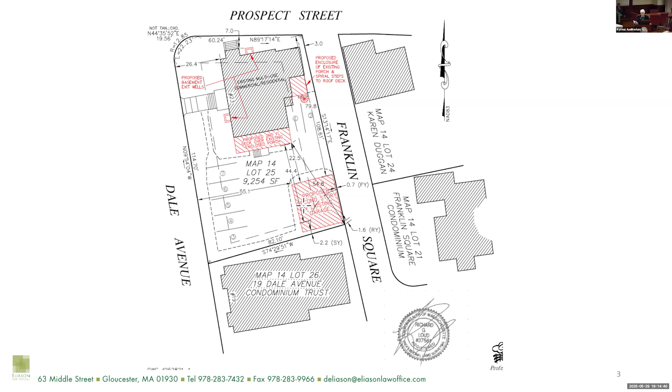There are 4 parking spaces required for the residents, 2 spaces for the office. That leaves 2 extra compliant spaces and the extra smaller space. I'd like to turn the presentation over to Mr. Taormina to explain how the building's going to change.

Sorry. Joseph Taormina, Taormina Architects. I'm at 10B Riverview Way in Gloucester. And I'll give you a brief overview of the proposed changes to the main building and the detached garage.

A little bit of overlap of what Deborah had said, but the 2 existing businesses on the first floor will be converted into 2 residential units. Each unit will have some basement living space, and therefore we have some egress window wells to provide the emergency exit for those basement bedrooms.

The existing porch on the Franklin Square side will be enclosed for living space. The 2 existing residential units on floors 2 and 3 will remain residential, as Deborah had said.

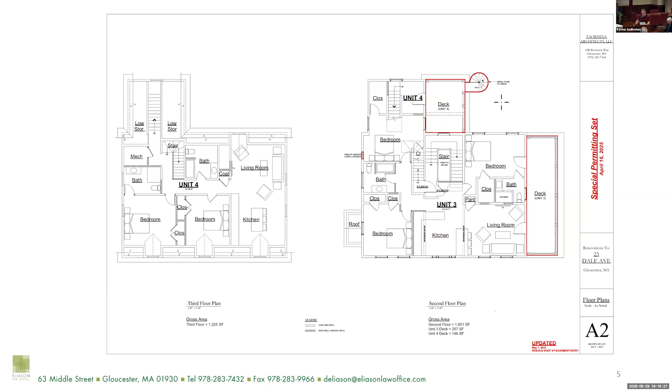Each unit will receive an exterior deck space at the 2nd floor level. Above those, there's a porch on the south side, the parking lot side, and on the east side, the Franklin Square side. Those 2 areas have flat roofs and will become decks for the upper units to have some exterior space. One deck, on the Franklin Square side, will have a spiral stair down to the driveway level. There are 2 massive chimneys proposed to be removed to accommodate the interior layouts.

The roof of the basement access, on the east side facing Franklin Square, has to be rebuilt. That's noted on the architectural plans, not the survey plan. It's really just to allow the stormwater to shed a little better and flow away from the building.

Each of the 4 units will have secured storage in the basement, plus there's an opportunity for bicycle storage. The basement will also contain the fire sprinkler room, 2 one-story areas - one on the south side, the driveway side, and one on the Franklin Square side. They're supported on piers right now, so we're proposing a permanent concrete foundation under those 2 just to protect plumbing, keep critters out, and make it weather tight.

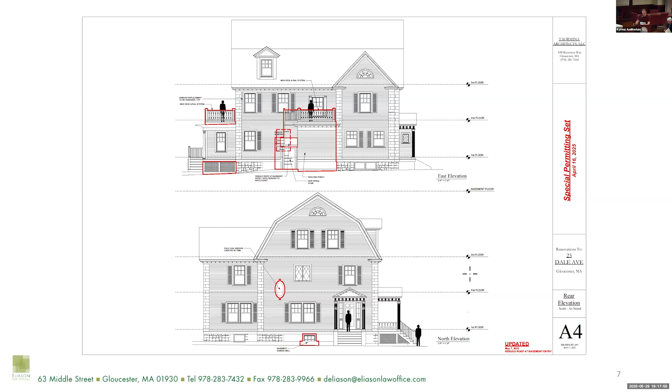Other than the 2 new 2nd floor decks, the exterior will generally remain the same. There's vinyl siding that will be replaced with new vinyl siding. There's a lot of painted wood trim that will be cleaned up and a lot of Victorian details that will remain. The goal is to maintain all those exterior details and replace as needed. The spiral stair and the basement window wells are the only changes to the building's footprint.

Over at the detached garage, the roof will be removed and a new second floor will be constructed. The stairway that goes up will take away from one of the spots in the garage, as Deborah had said, because of the new stair to get us up to the second floor private office.

The existing exterior stucco wall finish will be removed and new vinyl installed so that it matches the main building. The goal is for the exterior finishes to match and coordinate with the main building, so we will have a little bit of that Victorian detail there. That's the overview of the architectural changes to the two buildings. Thank you.

Thank you, Mr. Taormina. In addition to the variances and special permits we're requesting from the zoning board, we will also be seeking relief from the city council for the conversion to a 4-family, relief for height, which is existing at 39.4 feet and will remain that way. The new garage will be under the required height at around 26.5 feet. The reduction in lot area will also need relief. However, open space per unit is compliant.

We will also be seeking a certificate of appropriateness from the Historic District Commission because this building is in the Historic District. Mr. McSweeney sent out letters to all of the legal abutters. We've received 2 written letters of support, but they were not received in time to submit them to your package.

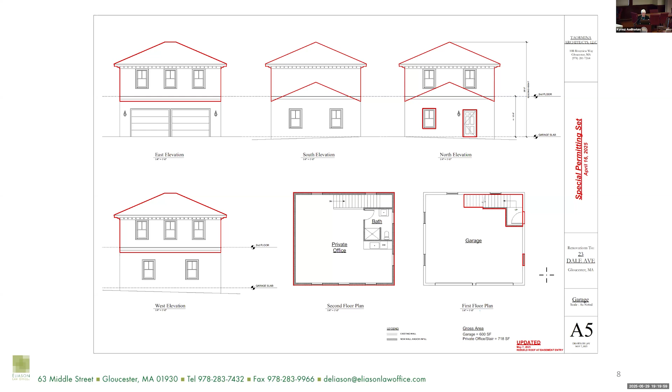Now I'll just go through the legal requirements. The variances may be granted without substantial harm to the public good and do not substantially undercut the purpose of the ordinance. Variances are for existing conditions, and the only reason they're needed is because of the change in use. The substantial hardship is the lot shape, having 3 front yards, as well as pre-existing conditions. The buildings were constructed around 1900, before there was zoning, and built very close to the lot lines. The setback encroachments are due to these locations.

We will add residential units that are sorely needed by the city. Since the office market has softened somewhat due to the trend of people working from home, in contrast, the housing market has risen. For these reasons, the variances do not substantially undercut the purposes of the ordinance and do not harm the public good.

With regard to 1.8.3 criteria, the proposed change of the garage to an office use is in harmony with the intent and purpose of the ordinance. The GZO allows conversion of the garage to an office space with a special permit. The amenities of a kitchenette, a sink, and a dishwasher, as well as a 3/4 bath, are customary features allowed by special permit. I would suggest that none of these will adversely affect the neighborhood, the R5 district, or the city.

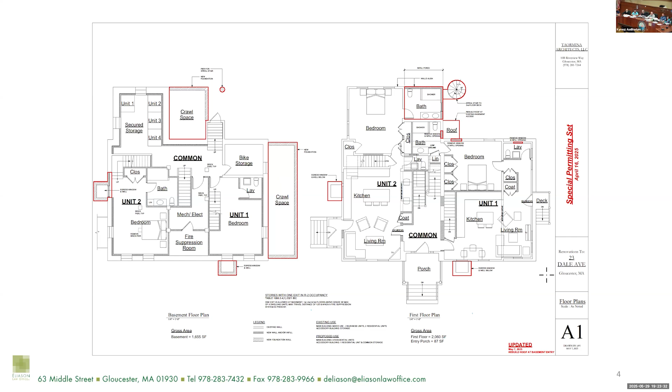So with regard to variances, we need a lot area variance of 746 square feet. For the residential building, we need a front yard variance of 12.7 feet on Prospect Street and 16.7 feet on Franklin Square. For the office building, we need a front yard variance of 14.3 feet on the Franklin Square side, a right side yard variance of 5.3 feet, a rear yard variance of 18.4 feet, and a vegetative coverage variance of 18%.

These are all existing conditions. The special permit under 2.3.4 subsection 1 is for the conversion of the garage to an office building, and special permit 2.3.7 clause 21 is for the customary accessory uses of a kitchenette and a 3/4 bath.

You can leave that up, if you would please. If you can just leave this up. Sure. Are we leaving off a special permit for the height of an accessory structure?

It's conforming, not the main house. The accessory structure doesn't meet the required setback—wouldn't it need a special permit for being over 12 feet? It is actually not an accessory structure, it is a principal structure, and there can be two principal buildings on a site that has multifamily.

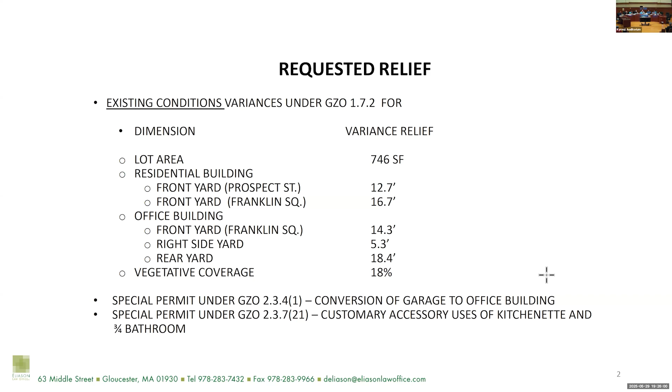But anyway, why don't we take some public testimony first, and then we can discuss that. Is there anyone in the audience or on Zoom wishing to speak in favor of the application? If you're here, come up. If you're on Zoom, hit your raise hand button.

Seeing none, is there anyone wishing to speak in opposition to the application? Nope, don't see anyone. Will close public testimony.

Discussion by the board, or more questions? I think probably similar feeling to you. Both of us have been on for a while. Not a big fan of the kitchen. Not a real big fan of the 3/4 bath, but I can probably tolerate the 3/4 bath without a kitchen. So those are my initial thoughts.

I mean, it is customary to have a place for coffee, wash your dishes, your lunch stuff, microwave, dishwasher maybe, I don't know, but I know what you mean. But what constitutes a kitchen versus... typically a cooking stove. A stove makes it a kitchen, right, Mr. Building Commissioner?

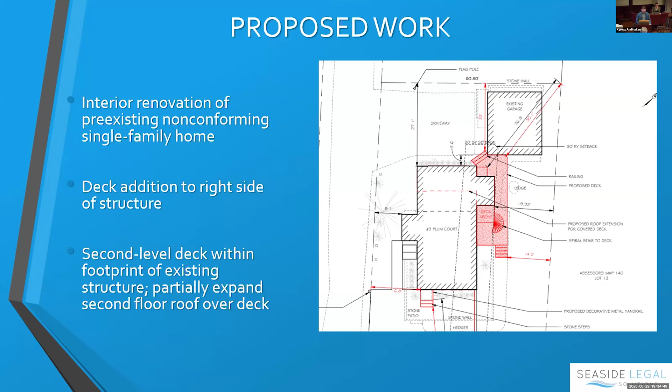By way of background, we're in the R20 district. It's a pre-existing non-conforming structure on a non-conforming lot. The lot itself is undersized, and the principal structure encroaches into the Plum Court front yard setback, and then partially into what's considered the right side yard setback. It's a corner lot, so the right side yard would be from the Washington Street side. I'll get into more detail on the next slide.

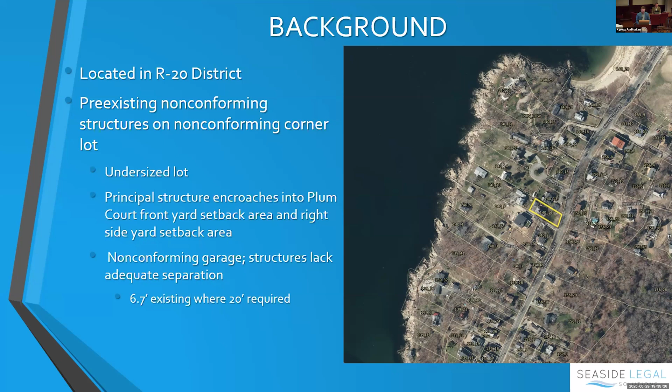There's a non-conforming garage in the rear of the structure, and the two structures presently lack adequate separation. There's around 6 foot 7 inches existing between structures where 20 feet is required in the R20 district. So we're seeking a special permit to alter and expand under GZO section 2.4.3.

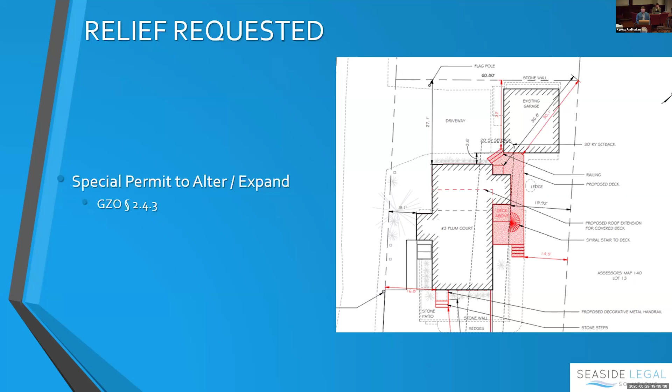This should need only a special permit, no variances, for the following reasons. As I mentioned, it's a corner lot, so the actual buildable envelope of the lot is shown as the dashed blue line on this slide. What's shown on the left is the Plum Court front yard. What's shown on top is the left side yard setback area. What's shown on the right is the right side yard setback area. What's shown below is the Washington Street front yard, which is out of screen because it's conforming and not really relevant to the work.

What's shaded in red is the actual expansion upon the current footprint of the structure, that is the right side yard deck addition. As you can see, we're very close to that setback line on the right side yard, but we are over that line. So it is presently non-conforming with respect to that right side yard setback area. While we are increasing that non-conformity, we are not creating a new non-conformity, so a variance should not be required.

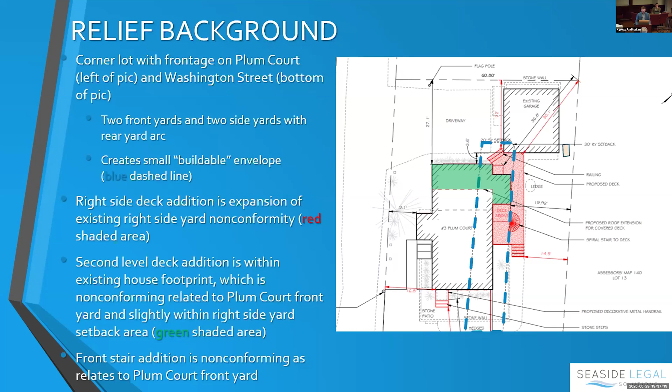The second level deck is wholly within that green area, and there's a partial expansion, 6 foot 6 inch expansion of the second level deck, which again is wholly within the footprint of the existing structure, but it is in that Plum Court front yard setback area, so that would probably also be considered an expansion of the pre-existing nonconformity. Lastly, at the bottom of the screen there's a front stair addition, which is completely non-conforming with respect to the Plum Court front yard setback area.

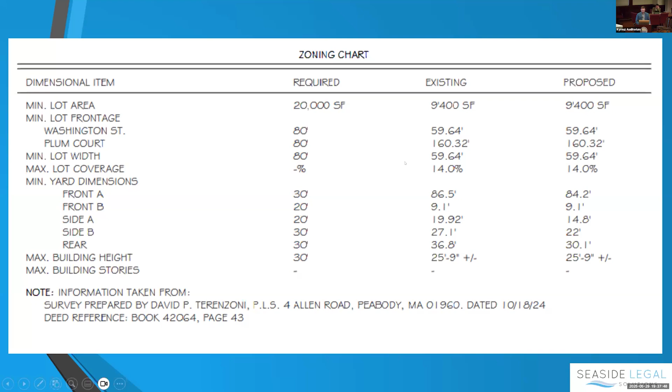So we are, again, non-conforming with respect to that right side yard setback area. You can see that right there on this version of the site plan.

Here's the floor plan for the first level. What's in red is all new work, mostly interior, but at the top of the screen there's the deck addition which goes beyond the existing footprint of the structure.

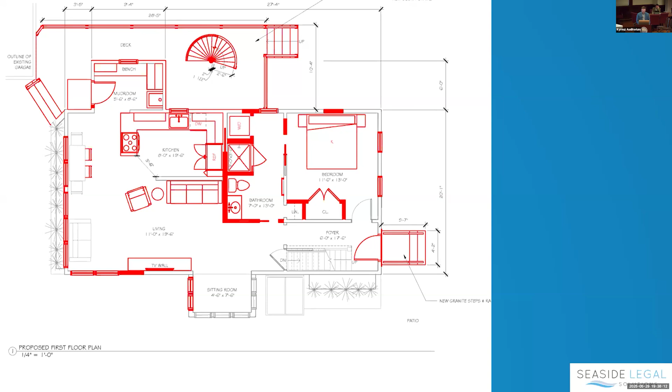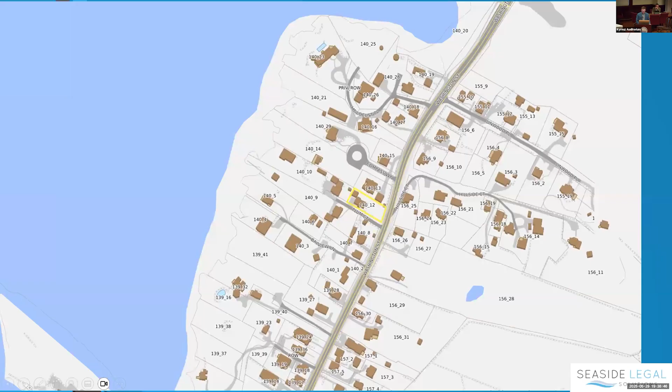The standard for a special permit to alter and expand is that the board must first find that the work will increase the non-conforming nature of the single family structure. If so, that work cannot be substantially more detrimental to the neighborhood than the existing non-conforming conditions.

As I mentioned, the second level deck is wholly within the existing footprint, and the front stair is no closer to Plum Court than the existing footprint of the structure, so we're not expanding the nonconformity in that respect. But the right side yard deck addition will increase that right side yard nonconformity, so we do think the board will find an increase in the nonconforming nature of the structure. Here's that plan again, if you have any questions.

Once you find that it does increase the nonconforming nature of the structure, you must find that it's not substantially more detrimental to the neighborhood than the existing conditions.

Again, we're not getting any closer to the Plum Court property line with regard to the second level deck or that front stair addition. And where we are expanding the nonconforming nature of the structure on the right side, there's a large vegetated border between the two properties, which we would take a condition to maintain, should the board feel that's necessary.

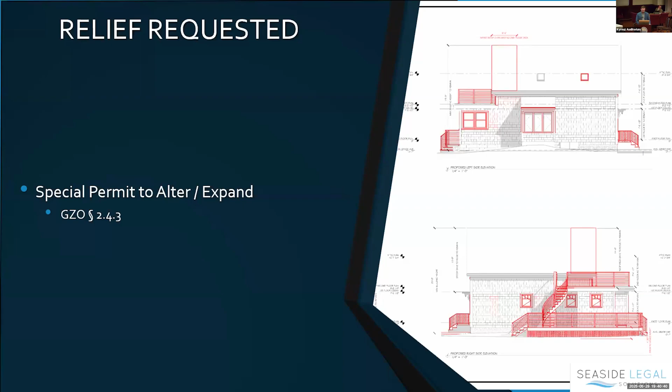Here's just a picture of that vegetated border, which would shade that addition that's mostly on the north side. So where the structures are relatively close to each other, that vegetated cover should provide sufficient shielding. So again, we're just requesting a special permit to alter and expand, and that is all. Thanks.

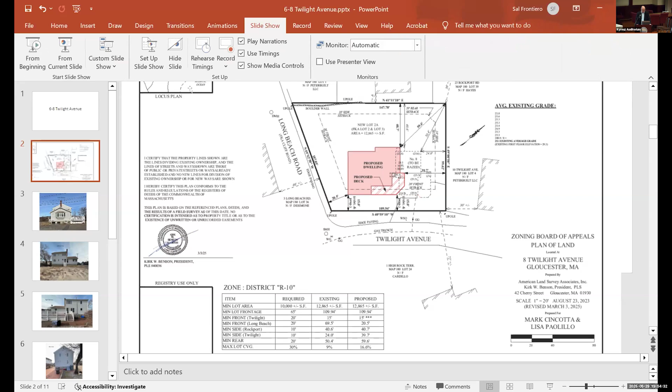It will increase lot coverage by almost 7%, and although it's still going to be 15 feet away, there'll be more building bulk within the setback, adding about 20 square feet total. So we're here seeking a special permit for that reason. As this board knows, it's a two-pronged test. The first is, are you increasing the nonconformity? I would submit here, although it's de minimis, we are in fact increasing the nonconformity, because we have more linear feet within the front yard setback. So although it's minor, it is increasing the nonconforming nature.

Here's some pictures of the existing home in the front. Here's the right side view, and here's the other side view, and this is a rear view. It's a fairly modest house. This is a street view, and here you can see the corner lot. This is the vacant lot I was talking about, and the lot line is about right here. The house is going to be shifted about 50 feet to the left and increased in size slightly.

Because we are increasing the bulk within the front yard setback, I would submit we are increasing the nonconforming nature of the structure, and therefore we need to go to the second prong of the test. Here, with very little effect on the front yard setback, we are on a corner lot. Also the front yard setback is actually in practicality a little bit greater than it appears, 15 feet, because the road is not paved to its maximum width. Also, although we're complying with the left side yard setback, we also are abutting a street there, so it won't be close to another residence. Based on that, I don't think it'll be substantially more detrimental to the neighborhood.

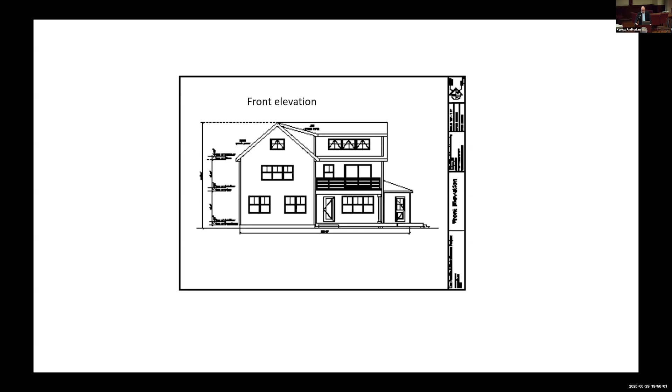Also under 2.4.5, we also have to condition that the tear down and rebuild be approved in the same hearing, and that the rebuild happen as expeditiously as possible after the tear down. This is the proposed front elevation, and this is the proposed left elevation.

There's the right, and there's the rear. Based on this, I would submit to you it's a very minor change, so the special permit should issue here.

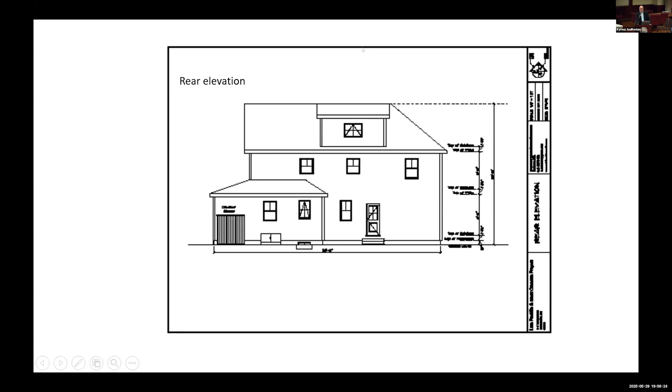Just curious, you don't have to answer if you don't want to, because I don't have an issue with what you're asking for with the special permit, but why not just move it back? I was just curious. Good question, I'm not sure. I think they maybe wanted to maintain the same facade they had. I'm not quite sure about that. The view, and like you said, there's a lot more distance because of the road. Right, there's a lot more usable distance than there is legal distance. Okay, I was just curious.

Okay, we'll take testimony. Anyone wishing to speak in favor of the application? Come forward or raise your hand. You're on Zoom.

Good evening, Joel Favazza. I'm here speaking on behalf of Susan McNulty and Peter Carboni. They own and live at 2 High Rock Terrace, right down the street. They were before this board a few years ago seeking very similar relief, to take the existing house, expand it a bit, and rebuild. You were kind enough to grant them the relief then. We think we understand the plight of these neighbors as well, and we would hope that you too would grant them the same type of relief and allow them to also rebuild their structure.

Thank you. Anyone else in favor? Being none, is there any opposition? Anyone wishing to speak in opposition to the application? Sally, you can't speak in opposition to your own client. I know that, I'm aware of that. Okay, close the public testimony. No need for rebuttal.

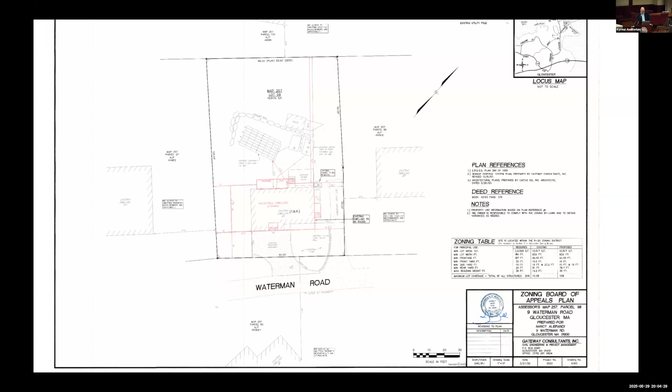Here is the building itself — this is the existing building, and it's being expanded to the left a bit. Here is the existing structure: a side yard view, front yard view, and most importantly a rear yard view. This is a rather unsightly roof deck that my client inherited when she bought it. Many people don't like roof decks for their appearance and for the lack of privacy you get, so that'll be completely eliminated as a result of this application. And there's a street view.

The new house will be a 3-bed, 2.5-bath. I do want to mention I made a slight mistake on the application — the front yard setback is being decreased in one spot slightly.

It's being increased only by 0.6 feet, so a very de minimis increase. And the overall lot coverage will increase by 6%.

But because we're on an undersized lot and we're increasing both the area and the bulk, and because we're increasing in a de minimis fashion the front yard setback nonconformity, I would submit that we are increasing overall the nonconformity of the site, and we need to go to the second step, which is whether or not this is substantially more detrimental to the neighborhood than the existing situation.

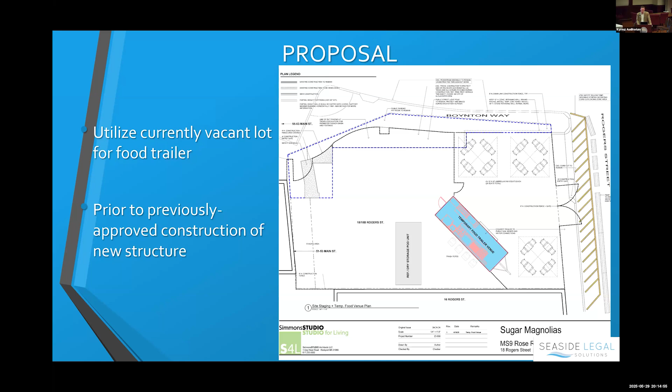By way of background, we are in the CB district. Missy received zoning approval back in 2023 to construct a 3-level multifamily building. The ground level will be Sugar Magnolia's permanent restaurant, with 2 residential units above it. We're facing some construction complications outside of the applicant's control, and as a result we have not gotten the building up yet. We're hoping to commence construction as soon as possible.

But at this point, to lose another summer season is really detrimental to the long-term viability of Missy's business. Looking to maintain business continuity and community connection - I'm personally looking forward to getting some lunches from Sugar Mags again, I think I'm way out of shape since I stopped getting salads there. So she's going to run the food truck during the peak summer months, and then at the end of the busy season, remove it and hopefully be breaking ground.

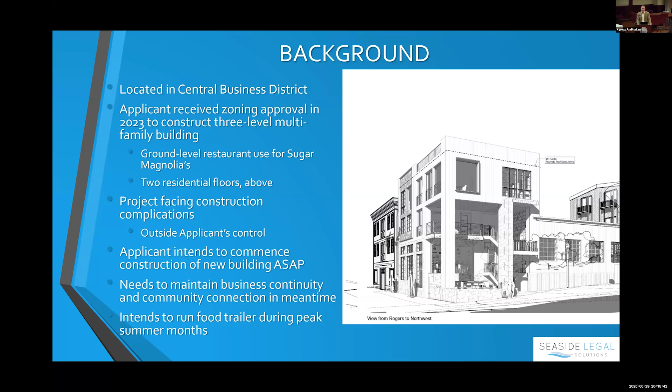So that's what's supposed to be there, and this is what's here now. It's a compacted gravel lot. There are utilities - water has been brought in, electricity has been brought in.

Because this will be fully outdoors, everyone would order from outside the truck and eat outside. There'll be no indoor facilities. However, as part of the Chapter 91 licenses for the Gloucester House, Minglewood, and Oak to Ember, all 3 of those establishments have public restrooms that are not for patrons only - any member of the public for any reason can use those restrooms. So if someone using the temporary Sugar Mag site for lunch needs to use the restroom, they'll be able to use any of those public restrooms directly across the street.

Per usual, we have the full set of plans, which is just the site plan because there's no structure. This is another shot of the lot from the rear - this is if you're at the back of the cafe looking down toward Rogers Street. This is from the side; this is actually called Boynton Way. I learned that when we did the last round of permitting - this road actually has a name. It's just a little parking lot.

Again, back down to the corner at Rogers, and now I'm over on the left-hand side looking from Rogers. So this is a neat little permit - I don't think I've been before you asking for one of these special temporary structures, but it does still use the 1.8.3 standards, just to find that it's in harmony with the intent and purpose of the GZO, won't adversely affect the neighborhood, and use a 6-factor test.

So again, social economic community needs. We're allowing this local favorite restaurant to maintain a presence in the city after its recent absence. We're also allowing Missy to derive some revenue from this site that she's been carrying for years.